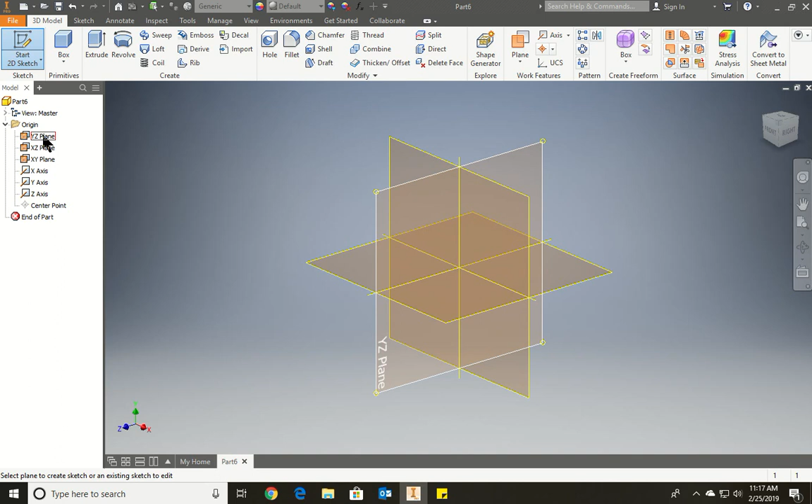Let's press Delete. I don't know what just happened there, but let's go Sketch again, using the YZ plane. I have no clue what happened there before, so it's okay. A circle from the center, we're going to draw it at 0.75. Before it did something completely weird, I don't know what it was, but it's okay.

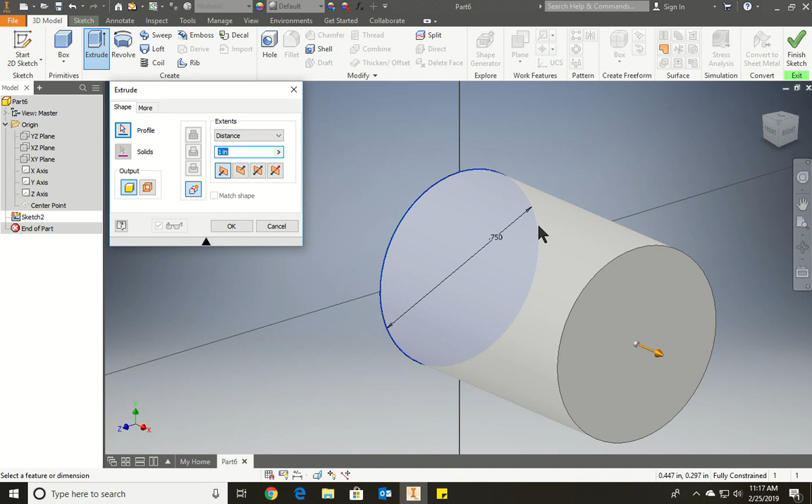We're going to do our extrude now, distance 3. Does it make a difference which direction we're going in? No. So I'm going to mess around and do it in the other direction, going backwards. I'm going to press OK. So now we have our cylinder for our bolt.

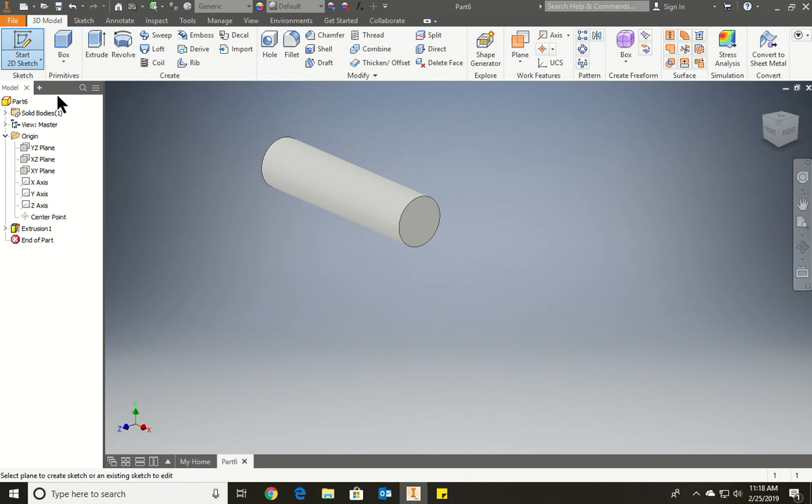The next step is we're going to sketch again on YZ, and we're going to do a polygon. Under rectangle we should see polygon. We're going to choose how many sides we want, 6, which is perfect. And do we want it inscribed or circumscribed?

Circumscribed. We're going to grab the center and pull it outward. What's our distance going to be? Does it give it to us yet? So it should be inscribed. Thank you for telling me the correct one. We're going to just click anywhere at the moment.

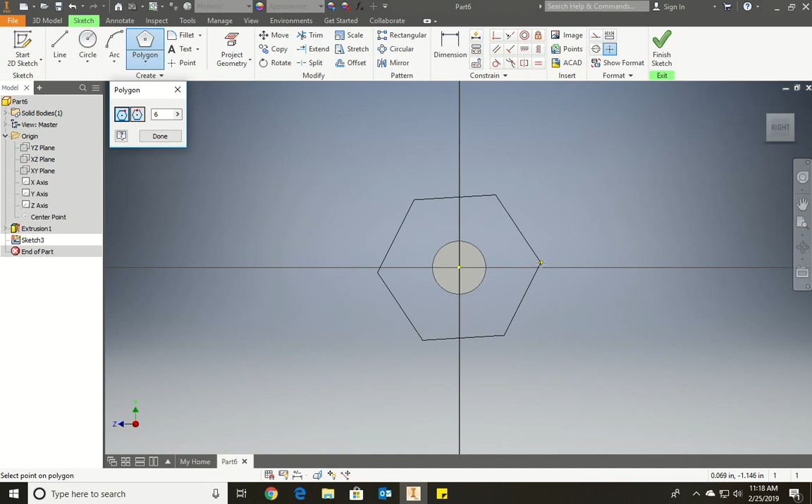Do we agree? Afterwards we're going to put a dimension in, making sure it's straight along the line. We're going to put a dimension from here to here. Should be how much? From here, erase this. From corner to corner?

Oh, sorry. It's the same thing, guys. What's this supposed to be? 1.5. So it's the same, even if it's this orientation or it looks like this. It's the same thing, guys, it's the same piece either way, you're just rotating the piece around. Here, I'll go this way to make it easier for some of you.

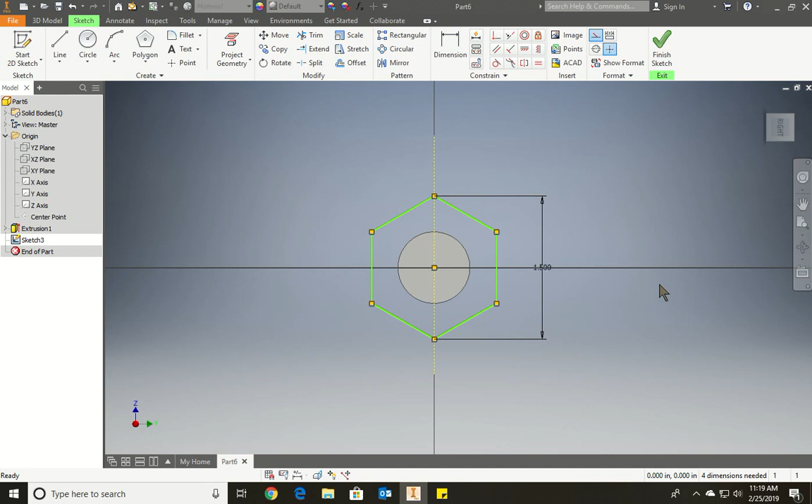Now we're going to draw a line, right? And we're going to draw a line, correct? Do we draw a line down the middle? Am I jumping ahead? We're going to draw a construction line, from here down the middle, like so. Okay, and then we're going to extrude.

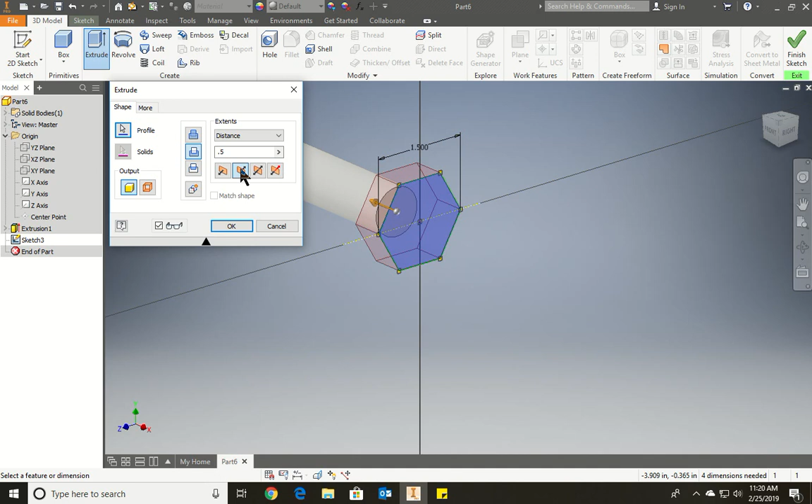What's our extrusion going to be? 0.5. Going up or going into the screw? Does anybody know, Direction 1? Is it we're going into the screw or above the screw? Above the screw. Press OK. And there's our screw right now. If we press home, we see it looks like so.

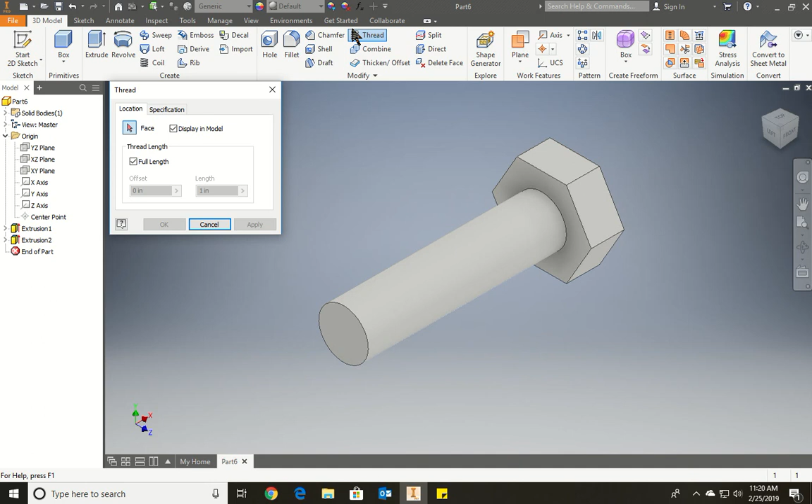Now we're going to add our thread. So how do we do it? We go back to Modify, and we're going to add our thread. We're going to choose our face, like so.

And then what do we do? Do we go full length? No, we want a length of 1.5. We're going to press specifications, and make sure we go right hand. We're going to make sure we have this one selected. Everything else looks okay, and we're going to press apply, and then OK.

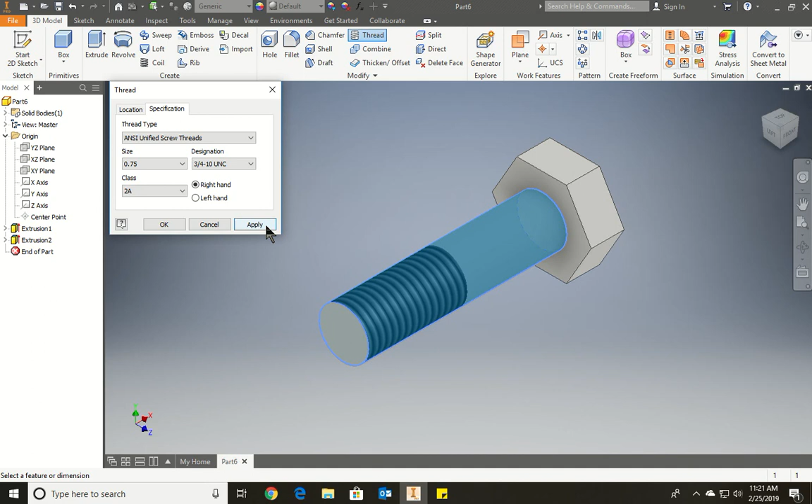So now we have our piece already done, correct? Let's save this first, file save as, and we're going to call this tutorial 6. We'll press save. So now we have our screw.

Good. The next step we're going to do is play with the iParts, which allows us to modify the shape of the screw automatically by just clicking on it. So on the ribbon, we're going to go to 3D and go to Manage Parameters. Where is that? It should be here, is it missing? Right here, we're going to add it.

And now we have it added right over here. We see that? We do the drop down and add it like we've done before with the primitives. We're going to add this one for us. And then we're going to click on it. Now we get this lovely table over here. From here, we're going to type in diameter at the bottom.

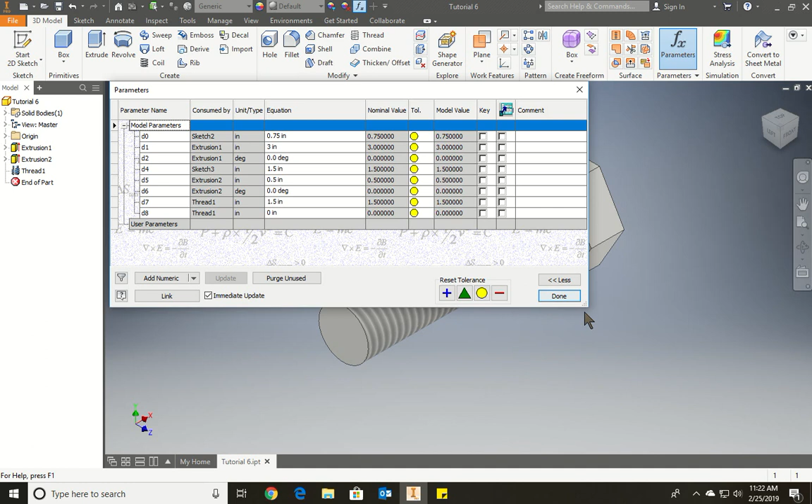So we're going to go here. We're going to add it right up here. So we're going to change this one. Yeah, okay, diameter.

Now that we did that, this one here is going to be the height. I spelled height with capital H. This one's going to stay D2, and this one's going to stay head size. This one's going to be head width.

Maybe I'm going to do this one to make it a little bit easier. I'm going to put capital S there, and capital W, like this. And then the last one, this is going to be...

This one, it's okay. I'm going to call this one D5 or D6? D5 is okay. And this one here should be thread. Okay, like so, and I can leave this one just to make it look like you guys have it. D7.

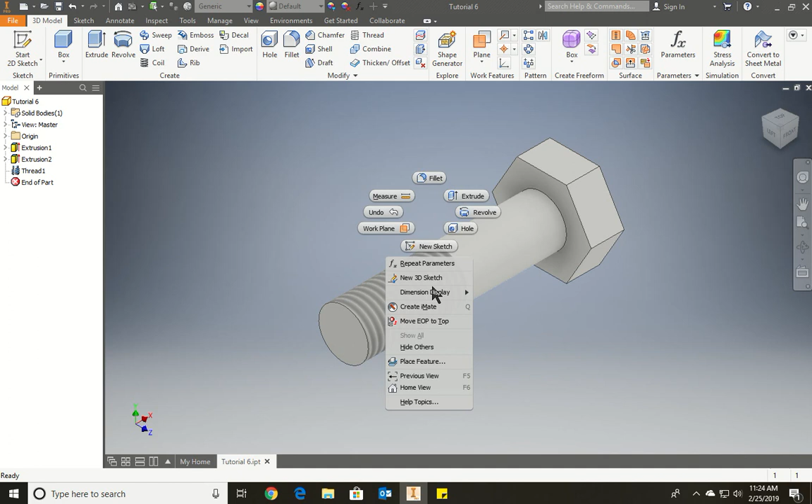So now that that's done, what's the next step we're going to do? We're going to press done. Now we're going to right click on the screen, go to dimension display, and we're going to do expression right over here.

Okay, what just happened? I think it's still loading, or it's supposed to do something. Now we're going to go back to extrusion 1, and we're going to go here and say show dimensions. And now we have them already set up.

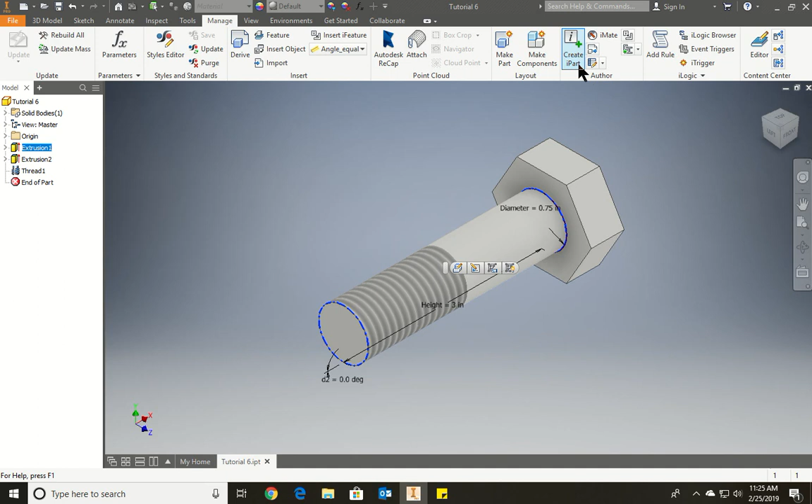Now that we have that done, we're going to go back to manage up here, and we're going to go to author right over here, and we're going to go create iPart, which is going to open up the iPart author right over here. Okay, and now for this part here, we're going to...

I think we're going to insert a new row. Right click, insert row. We're going to do it 3 times. Right click, insert row. So we add 3 rows.

In the second row of the table, which is this one here, we're going to type in the new values. For the height, we're going to type in 5. For the head width, 0.75. And for the thread length right over here, 3.

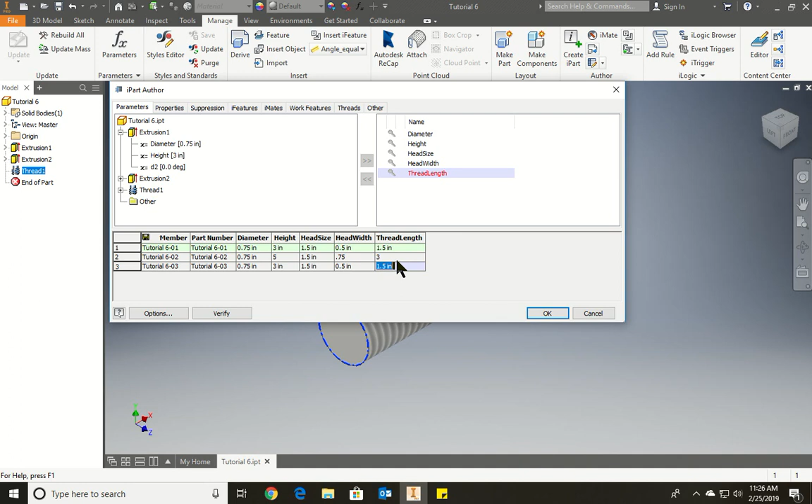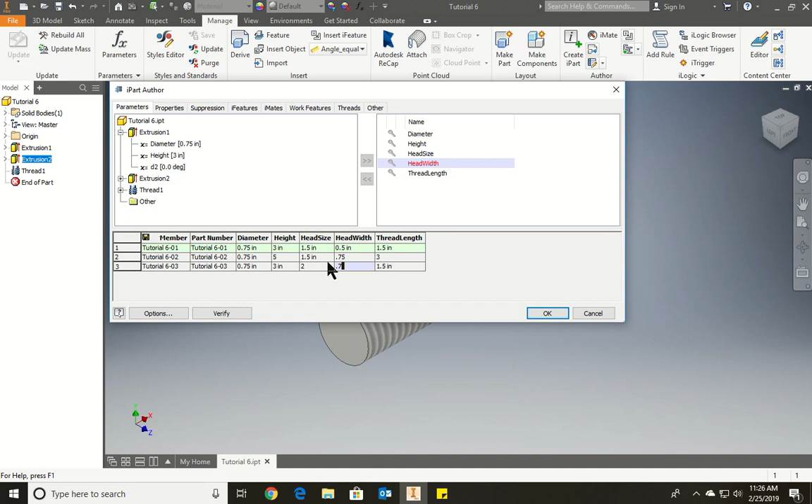And then for the next table, the third one, sorry, we're going to do the same thing again. We're only going to change the height, the head size, the head width to 0.75, and the thread to 3.

Alright, so now we're going to go and make number 3 the default. Right click, set as default. And we're going to press OK.

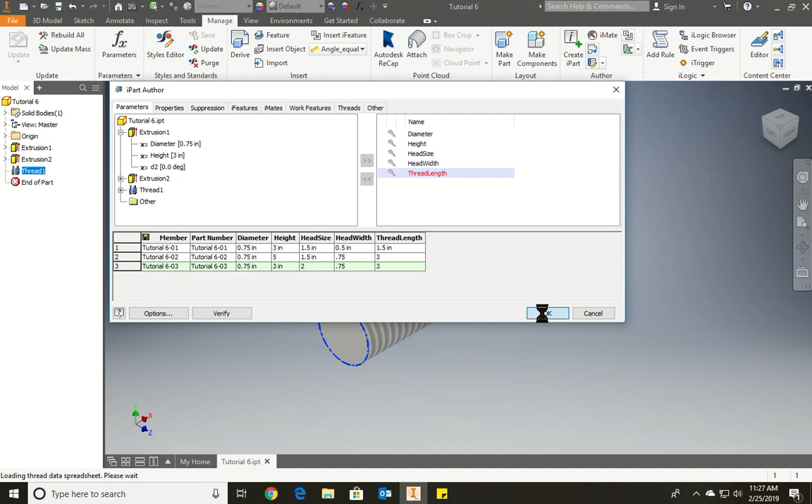And if you notice, our screw changed its location—it changed everything actually. So now if we go back to the browser, which is over here, and we go back to this, we should be able to see right over here, you see we have the table we built.

If I click on this one, it's one screw. Click on this one, it's the other one. So technically you could have renamed them so it's easier for you to understand which is which. So you have all 3 of them created.

Is it okay so far? So let's hit save, just so we don't lose this.

And the last part is just going to tell us if you want to edit—so open up, for example, part number 3, and you want to edit it, you just do right click, edit table, and you could play with the different numbers. You could add them, and you could even edit it via a spreadsheet as well, so you could open it in Excel. So I go right click.

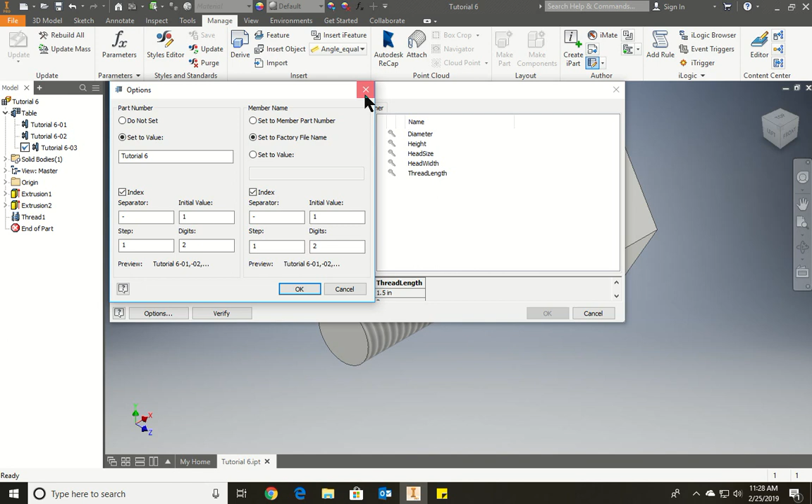I don't have that option. It should have allowed you to do also options. Probably you could do set it up, you could change it up, but you can see here we could modify it. We could generate files, add more, and add less.

So that was it for the tutorial on how to make a screw with different iFeatures. So we have feature 1, 2, 3, and as you notice, the numbers we put changed as well.